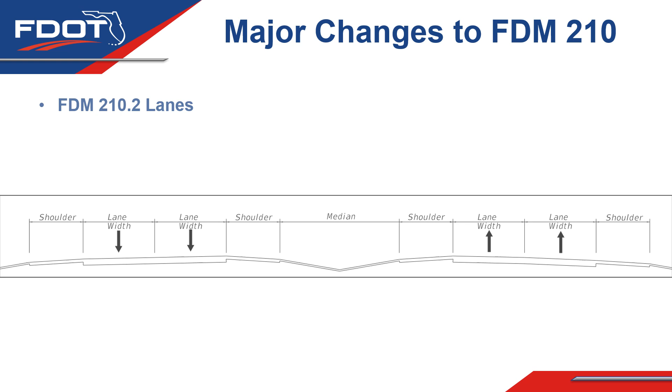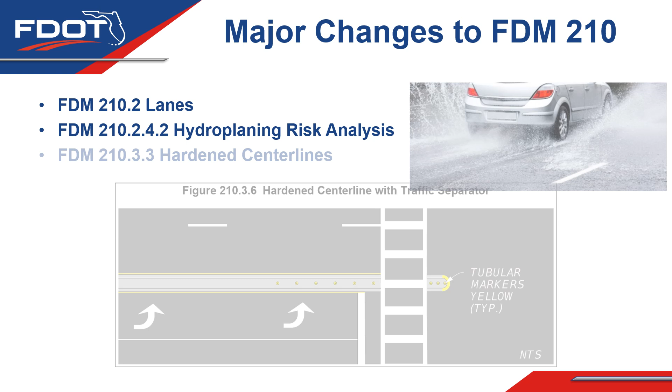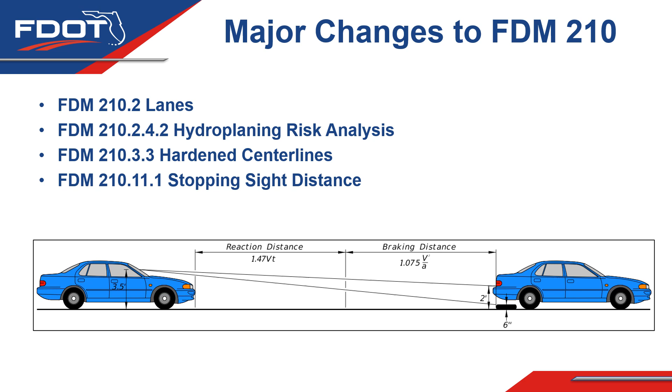The major changes we'll cover in this chapter include modifications to Table 210.2 for lane widths, clarification on hydroplaning risk analysis in FDM 210.2.4.2, additional criteria for hardened center lines in FDM 210.3.3, and clarification on stopping sight distance, object, and eye height in FDM 210.11.1.

In the minimum travel and auxiliary lane widths table, we replaced some lane width values with NA, where the combination of context classification, design speed, and lane width were outside of the intended range. And we added a note for NA. This table is now consistent with other FDM tables where NA and the note for it were added several years ago.

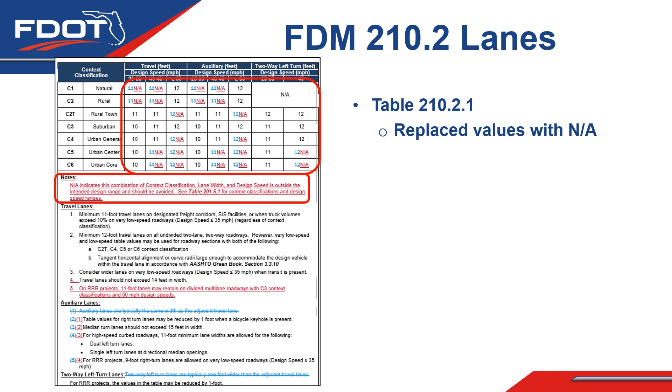We also added Note 5 for 3R projects to allow 11-foot travel lanes to remain on divided multi-lane roadways in C3 context classifications with design speeds of 50 miles per hour. Some districts were approving quite a few lane width variations, and this change was intended to give additional flexibility on 3R projects in these suburban context classifications.

We also removed two notes considered to be unnecessary. Note 1 for auxiliary lanes and the first note for two-way left turn lanes were both removed from this table. With that, I'll hand it over to Jimmy to cover hydroplaning changes in this chapter.

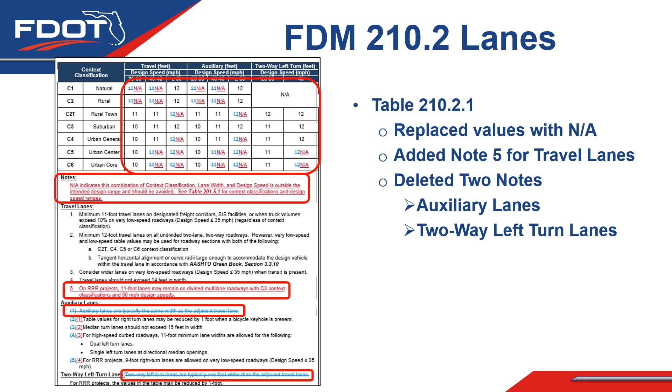Text was modified in FDM 210 related to the definition and purpose of a hydroplaning risk analysis. Previous versions of the hydroplaning guidance in the FDM referred to predicting water film thickness, hydroplaning speed, and thus the likelihood of crashes. This led analysts to running the hydroplaning prediction model only. This expanded guidance more clearly describes the components of a hydroplaning risk analysis, which remain outlined in FDM 211. Those changes will be covered in the FDM 211 presentation.

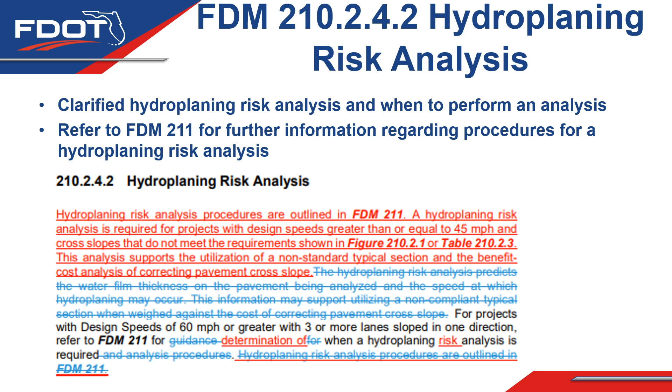In this section, we provided new guidance on 3R and minor projects for hardened center lines. Hardened center lines are not required for these projects where curb ramps would need to be moved or reconstructed to accommodate the hardened center line. This change was made to reduce the need for design variations in locations where it is not possible to accommodate hardened center lines due to project constraints.

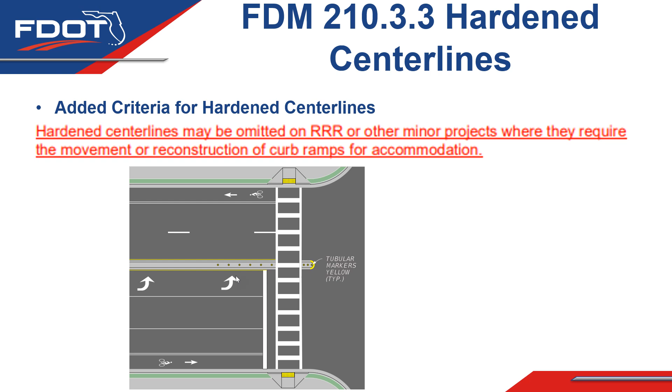In the stopping sight distance section, we modified language regarding object and eye height for stopping sight distance to be consistent with the minimum K values and notes in Table 210.10.3. This change is a clarification of when the 6-inch or 2-foot object heights are required.